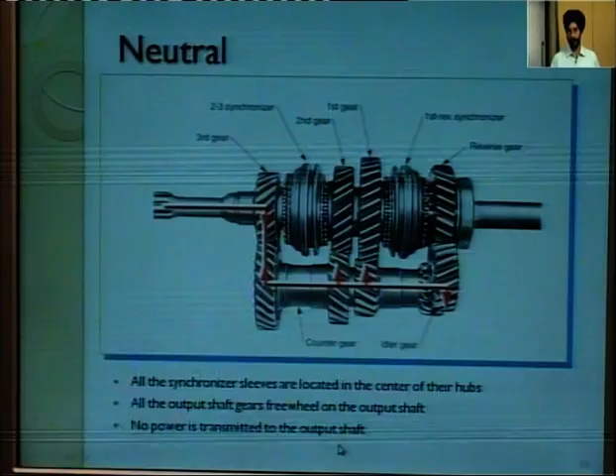But see the condition of both synchronizers. The first and reverse synchronizer and the second and third synchronizer are not matched with any gear. All the synchronizer sleeves are located in the center of their hubs. All the output shaft gears freewheel on the output shaft. The output gears are rotating, but we are not getting any output because these output gears are free on the output shaft, and no power is transmitted to the output shaft.

Now see, this is the condition of first gear. When first gear is engaged, a linkage rod moves the shift fork so that the first gear synchronizer is engaged to the first output gear. In this case, the first gear synchronizer is engaged with the first gear. Now power is transmitted to the first gear, from the first gear to this synchronizer unit, and through the synchronizer to the output shaft.

The input shaft gear turns the output counter gears. First gear is locked to the output shaft. In this way, we have locked first gear to the output shaft, and the small gear on the counter shaft drives the larger gear on the output shaft. Here we see the first speed reduction takes place when the smaller gear is matched with the larger gear. Again, speed reduction takes place when a smaller gear meshes with the larger gear again. So we are getting a gear ratio of 3:1.

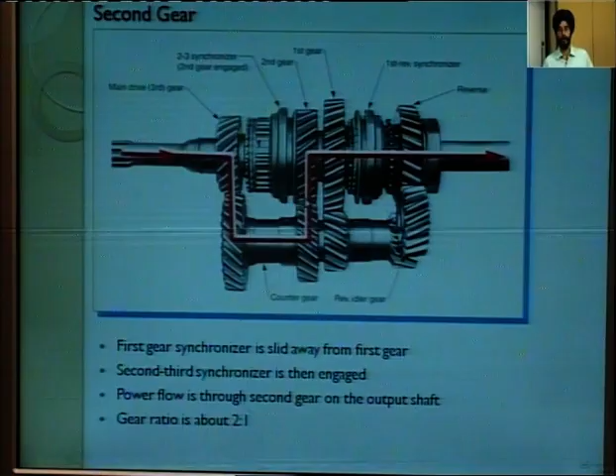This is the condition of second gear. In this case, the first synchronizer slides away from first gear, and the second synchronizer is engaged with the second gear. Now power flows through the second gear to the output shaft, and the gear ratio is 2:1. In this condition, for first gear and second gear, the RPM is reduced and torque is increased.

This is the condition when the third gear is engaged. Third gear is sometimes also called direct gear. In this case, the synchronizer is engaged with the clutch gear, and since it is engaged with the clutch gear, it will have the same RPM as that of the engine shaft, and the gear ratio will be known as 1:1.

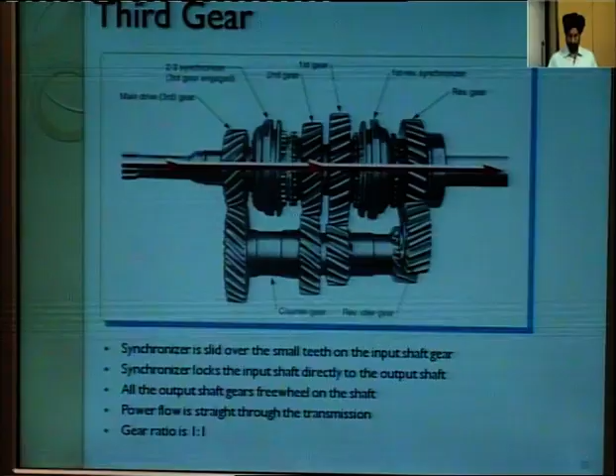This is the condition of reverse gear. As I have already explained, when we want to reverse the direction, we put in an idler gear. Say this is the idler gear. When the synchronizer is engaged to this reverse gear, power comes to this gear, then to the idler gear, then to the reverse gear. Here we will have the reverse direction of rotation.

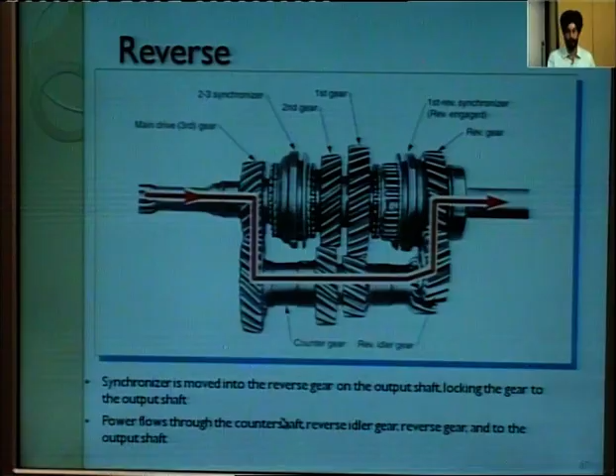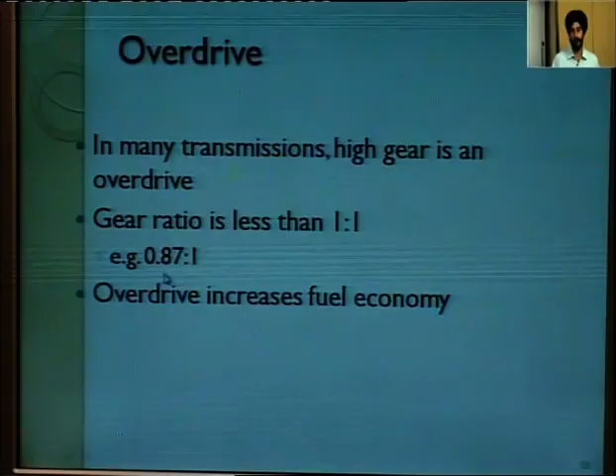In the overdrive, the high gear is an overdrive condition. In this case, we will have a still smaller gear on the output shaft, and the gear ratio is reduced to 0.87 to 1, which increases the overall efficiency.

With this, I have discussed the 3 types of gearboxes. There are other components of the transmission system, which include the engine attached with the transmission system gearbox.

Power is transmitted from this engine to the axle to wheels. We are having other components like universal joints here, 2 universal joints, a propeller shaft, and a differential to axles. This longer shaft which transmits power from gearbox to rear wheels is known as a propeller shaft, and here we are having 2 universal joints.

The purpose of universal joints is to transmit power at an angle. So with the use of this special purpose joint, power is transmitted to the differential, though the axes are at different levels. See, this axis of the differential and engine axis are at different levels.

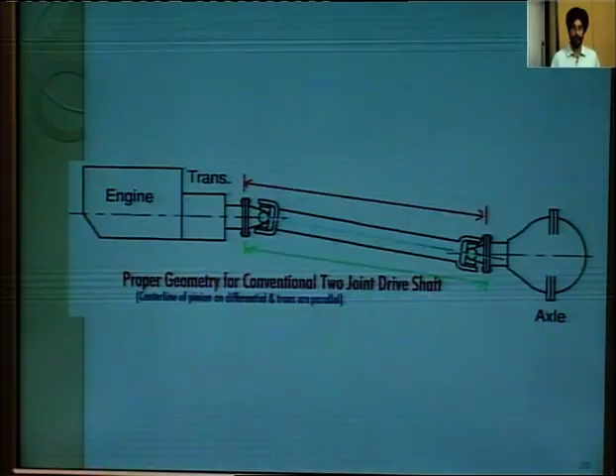So the differential provides difference in speeds while taking a turn, and when the vehicle moves in a straight line, it gives the same RPM to both left side and right side wheels. So the differential is a mechanism which provides variable speed to the inner and outer wheel when the vehicle takes a turn, and the same speed when the vehicle moves in a straight line.

See, this is a picture of a universal joint coupled with the propeller shaft. The propeller shaft is coming from the gearbox. It is revolving, and this motion and torque is transmitted to the differential through this universal joint.

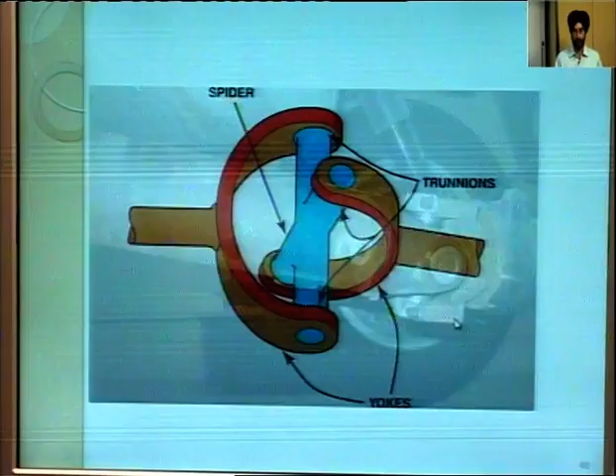See, this is the construction of a universal joint. There are 2 forks, 2 yokes, which are having a spider with a cross type construction, and these are called trunnions. This construction helps to transmit power at an angle.

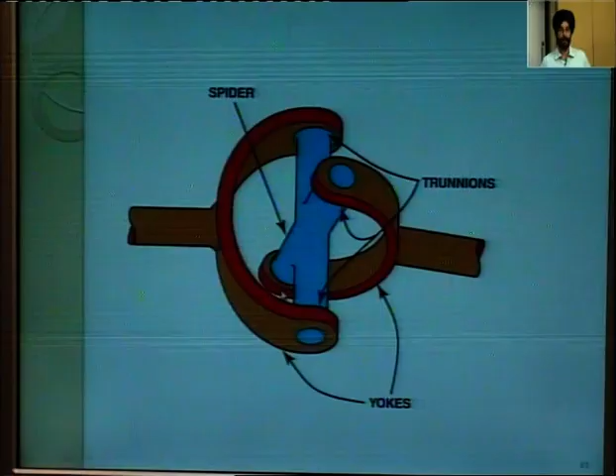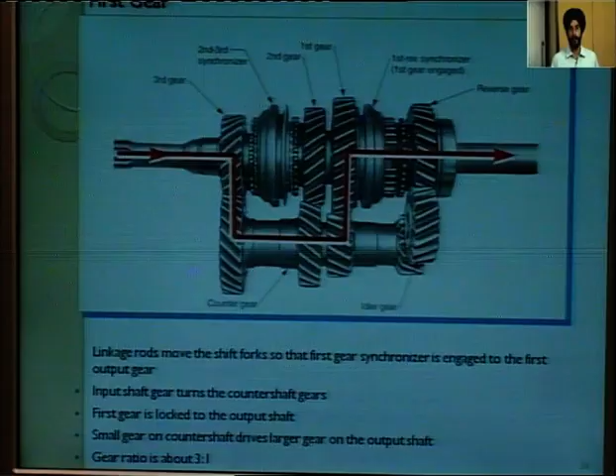Now I will summarize all the things discussed in this presentation. Firstly, what is the transmission system? It is a collection of components which is used to transmit torque, power, from the engine to the wheels.

Why do we require this transmission system? Because the engine develops power in a narrow range of RPM and torque, but in actual conditions we need a larger range of torque and RPM. So we need a system which can provide us a variable range, and that is done with the help of a gearbox.

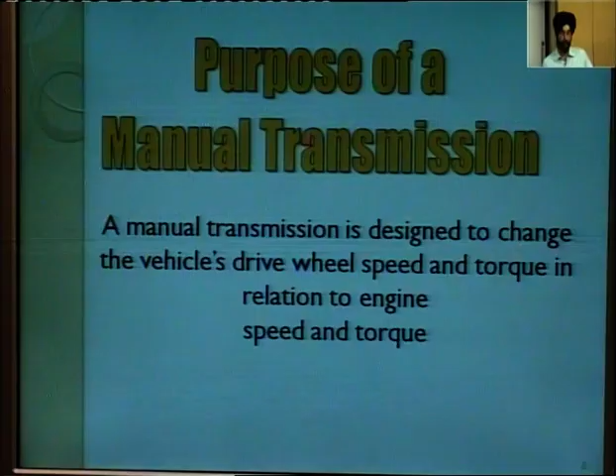The gearbox is a mechanism based on meshing of different sized gears, which provides variable torque and RPM. In addition to this, it must also provide means of putting a reverse gear, so that the vehicle moves in a backward direction, and it should be easy to shift gears, and its operation should be quieter.

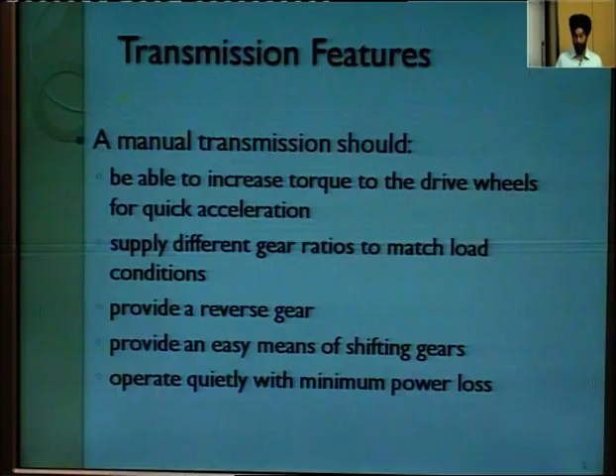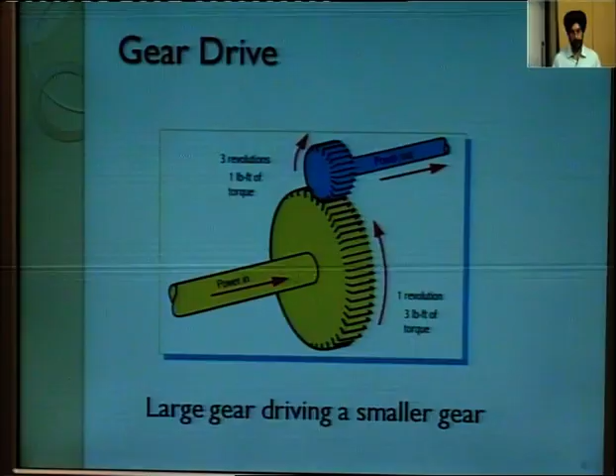This slide describes the fundamentals of how to get larger torque with smaller RPM. When we mesh a smaller gear with a larger gear, we get larger torque output and smaller RPM. But if the condition is reversed, as in the case of an overdrive gear, the output gear is smaller, and we get a larger RPM at the output shaft than the driving gear.

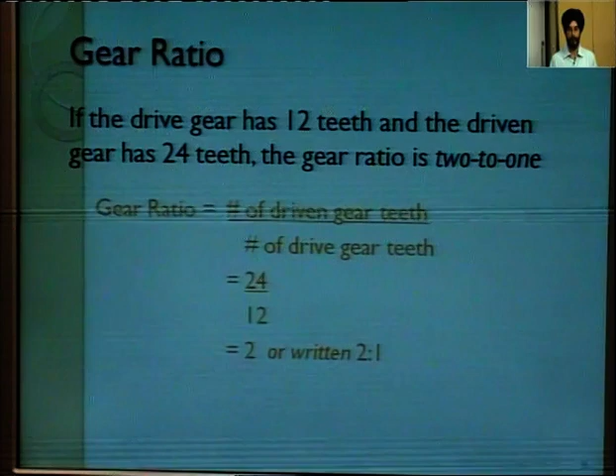And gear ratio is given by the number of driven gear teeth over the drive gear teeth. It is written as 2:1, like that.

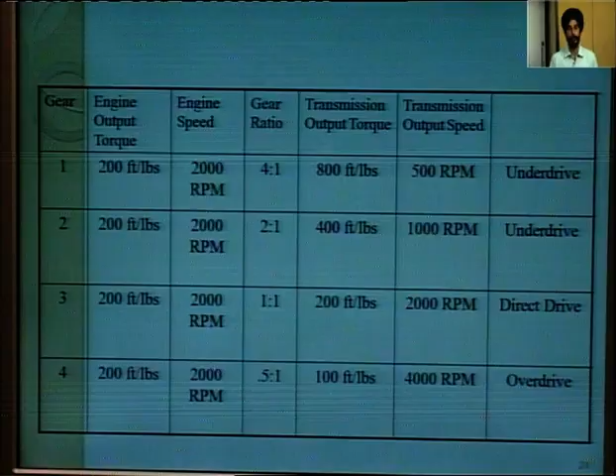Coming directly to the operation of the sliding mesh type gearbox. This is called sliding mesh because gears are slided to engage with the lay shaft gear. This type of mechanism has the disadvantage that gears get damaged while engaging and disengaging.

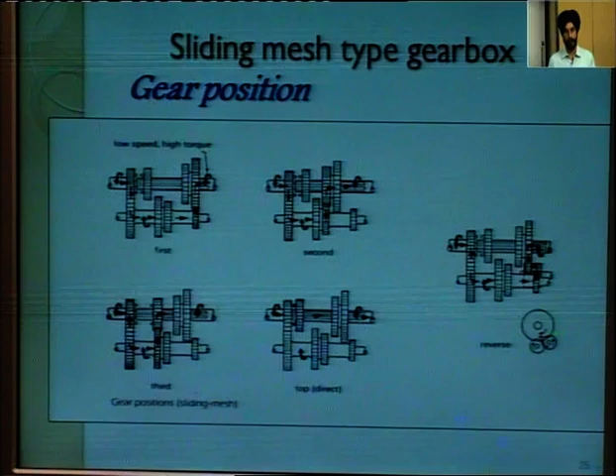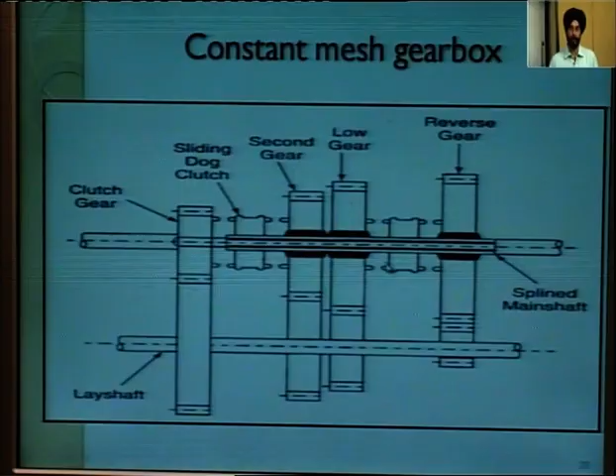Next is the constant mesh type gearbox. In this, all the gears are constantly meshed with the lay shaft, but they are not driving the output shaft. The power to the output shaft comes through these dog clutches. Again, it has a similar disadvantage, but to a lesser extent than the sliding mesh type gearbox.

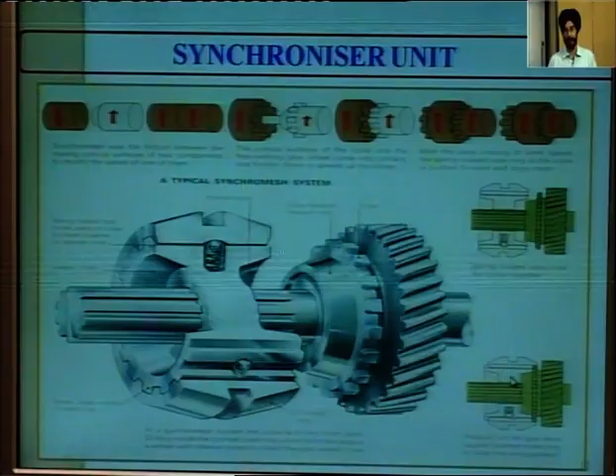And last is the synchromesh type gearbox. It is an improvement over the constant mesh type gearbox. In this case, we use friction on conical surfaces. These conical surfaces are engaged first, then this collar is slided over the dog teeth to engage with the gear. By doing this, we are equalizing the speed of the gear and synchronizer unit, so that there is no damage to the teeth.

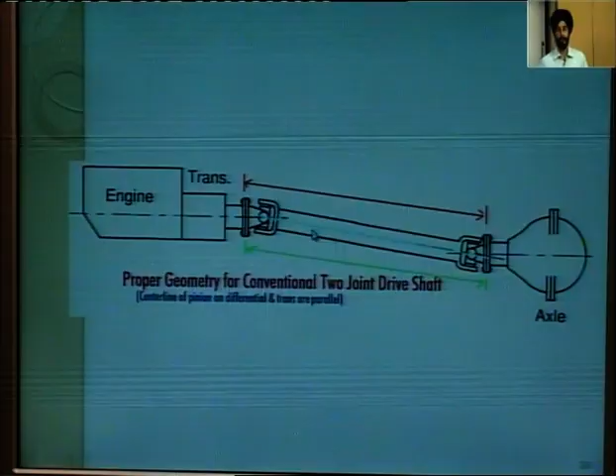And these are the variable positions, and these diagrams show the other components like universal joint, propeller shaft, differential, axle not shown completely, and here is the last one, the propeller shaft, universal joint, actual photo.

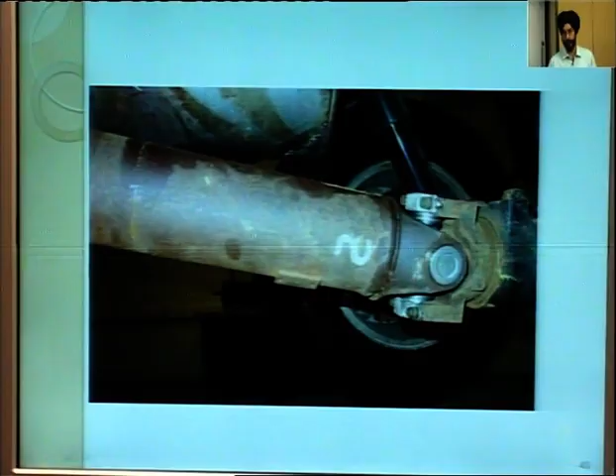This is the construction of the universal joint. Thank you very much.